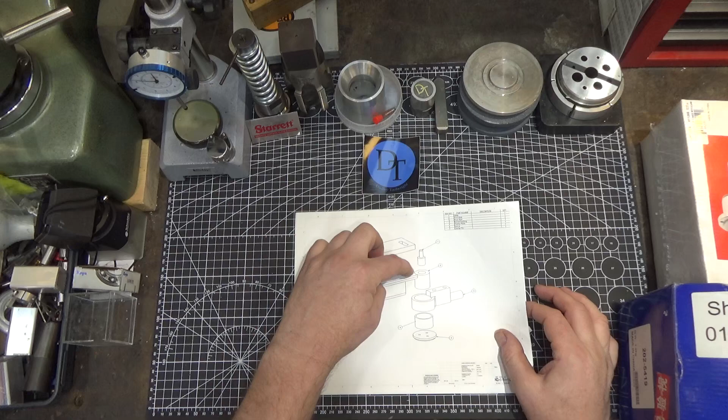Instead of the pin here, that 3/8 diameter pin that the stock rotates around, he used a 3/4 pin, which is this outside diameter of the base piece. And it seemed to work okay without too much effort on his part. So that's pretty awesome. The materials are pretty easy to come by, and I'm not sure that the dimensions on any of these parts are particularly critical.

A neat thing about the design is that the assembly here that does the bending is actually done by a 3/8 inch pin that sticks up there. My initial thought looking at the drawings without watching his video again was that this piece sticking out here did the bending, and I thought, gee, that may not last very long. But that piece actually mates up with the 3/4 diameter of this guy that sticks proud and makes a flush surface. It's actually a really beautiful design.

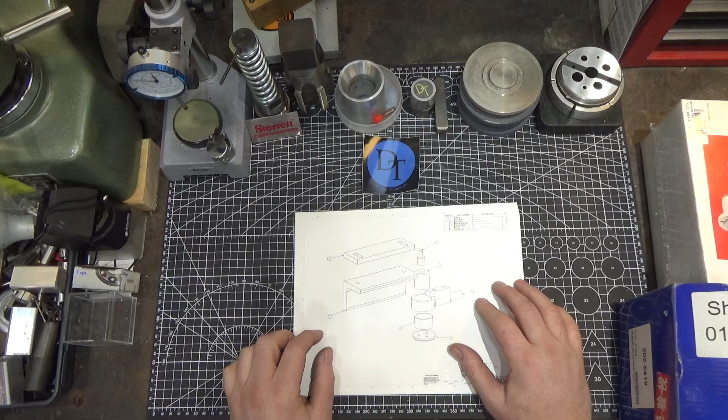So the part that does the bending is a 3/8 inch pin here, which you can easily replace, and this other pin here you can replace. There is a bronze bushing, so there'll be some cost in buying a piece of bronze there. You might be able to get away with some plastic in there, but it may not last very long with the crushing forces. Let's see what else we've got here.

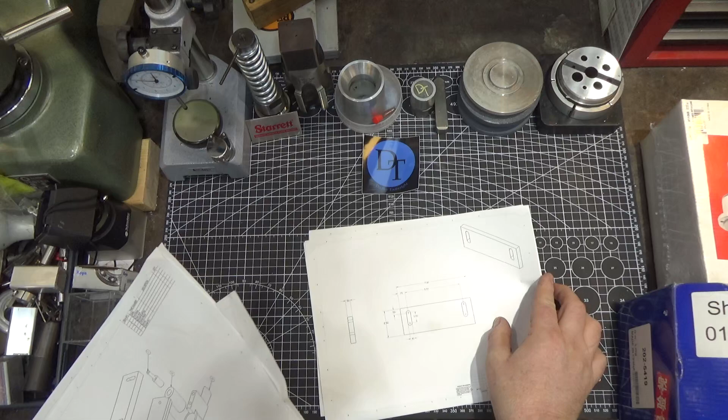The drawings he gave me are complete and pretty easy to understand. Tom is obviously a master, and he follows that rule that you don't double up on information, which is a standard for drawing design. I tend not to do that because sometimes I want to see a dimension on one representation of a part, and I'd also like to see the same dimension on another representation of the part.

But Tom, again, is a professional machinist, so he follows the rules of the trade. And so you can find any dimension you're looking for. You just got to find it on the drawing. It's all there. He did a very, very nice job on them. So thanks again, Tom, over at Ox Tools. And let's just get started.

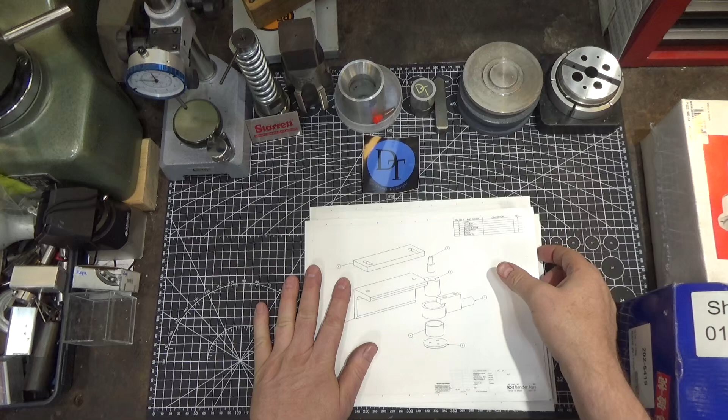Let's take a look at what stock I've got to make this guy. This guy's roughly 7 inches. Well, it is 7 inches long. This piece right here and this piece right here. This will make it stick out a little bit longer. So it'll fit in a 6-inch vise jaw, no problem.

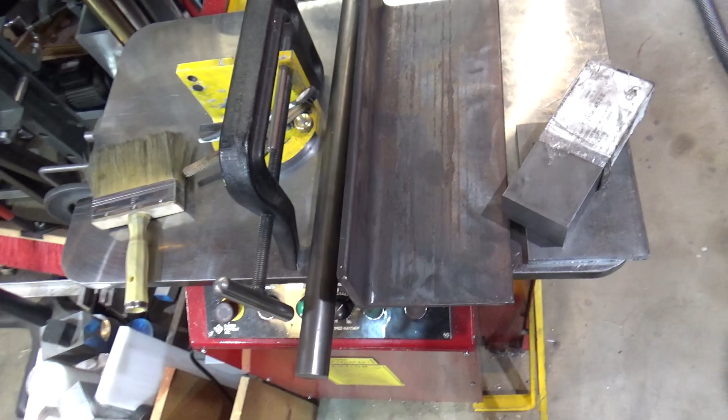Here's the stock I found for making Tom's rod bending project. And I buy all these as offcuts at my local metal supplier. For me in Southern California, that's Industrial Metal Supply. There aren't a lot of other suppliers down here. There are a couple, but not anywhere near me. But the advantage of buying cutoff is, like this hot rolled 1.5 inch rod, this guy is about 2 feet long, and it's the same price as their pre-cut 1 foot length. So that's a great find. I always buy those when I find them, even if I don't necessarily need them, because I'll use them later.

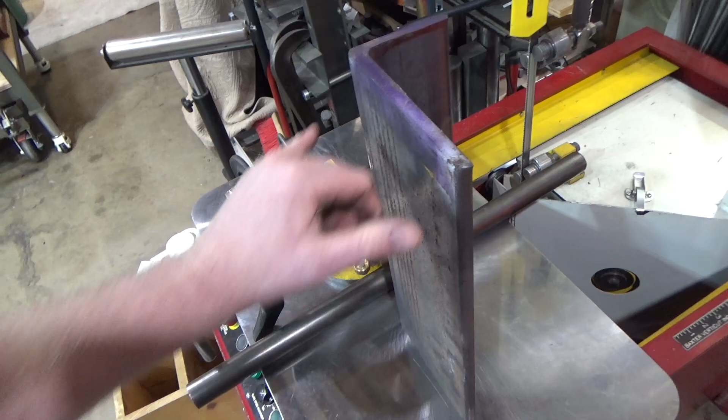This guy has a really weird proportioned angle iron, 1/2 inch thick, which Tom spec'd. It's more than 3 in this direction, obviously a lot more than 3 inches in this direction, but I can cut it down. And the advantage was, instead of paying full price in the artist corner, it's 49 cents a pound for steel plate. So this was fairly inexpensive, and we'll just clean it up. And these are some hot rolled cutoffs. And that should be everything I need to make this project.

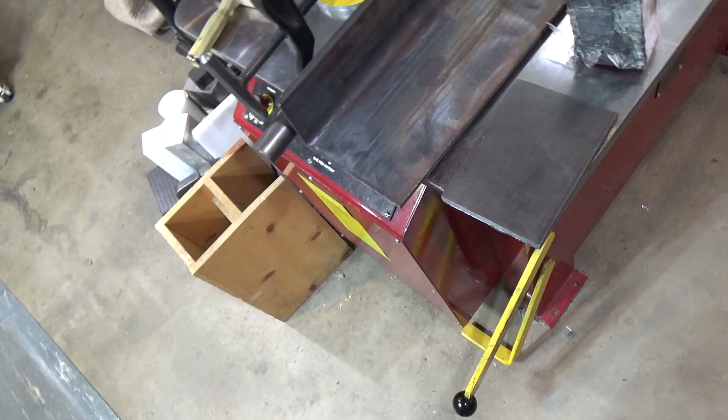I am going to have to dimension these. I have to spend a fair amount of time dimensioning these, so rather than make you watch all that effort, I'll probably bring you back. One thing to note, though, is that when I'm cutting this angle piece, I have a trick that I learned from someone else's video that I'm going to use. Let me show you what that is.

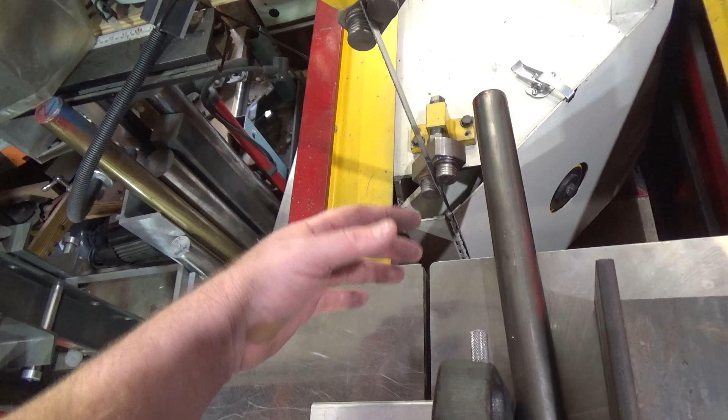So my first intuition was to take the angle piece, pop it up here with the long part sticking out, and that would go really great until you get to the end. Then I'd be cutting over 4 inches of material, 1/2 inch thick, which would cut much more slowly, not just because there's so much more material, but because the individual tooth pressure would be spread out over 4 inches instead of 1/2 inch. So even the tooth pressure would go down.

And if you increase the tooth pressure, you might overfill the gullets and then cause your blade to break or stick or get damaged. So one of the tricks you can use when you're cutting material like that is to flip it like this so that you have a consistent thickness all the way through. The clamping isn't quite as good, but it's still more than adequate to do the job. So that's what

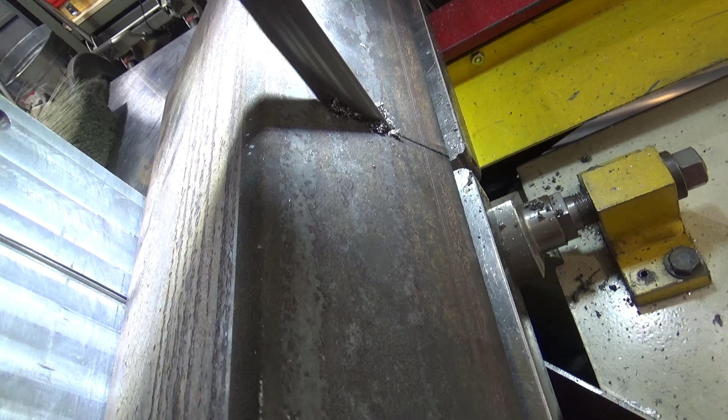All right, so I figured I'd start with the base part first, the part that clamps in the vise, and I've labeled the vise on the top sides. Not that it's really essential, but just to keep me honest. And we're just going to load this guy in here. And so I can get my 0 and repeat it, let's clean this off. We'll just use my vise stop and come up against it. And I'll set my zeros based on that.

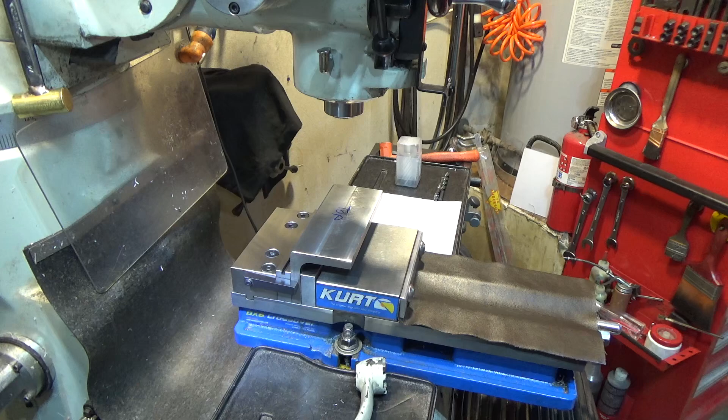And we'll start. First, we're going to drill and tap a couple 3/8 inch holes back here, 3/8-16, and then we've got to remove a 1.5 inch section out of the corner of this where we'll be welding the rotating post on. So that's a later part of the project, but we're going to get this part done and knocked out. I left the sides of this rough sawn because I like the look of it.

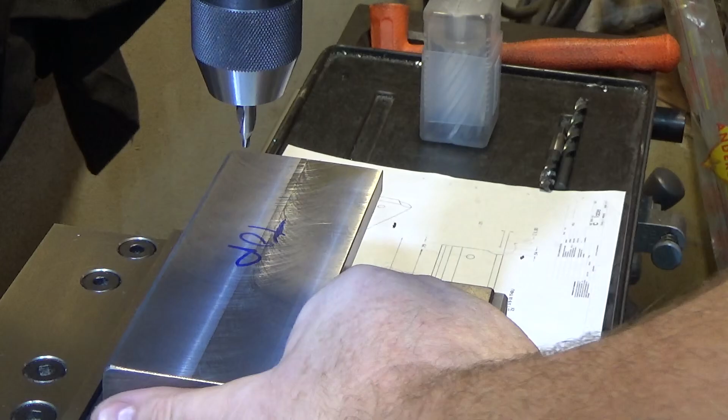So what I'm doing, which is how Tom has his drawing made, because that means the dimensions of this aren't critical width-wise, is everything's based off the center line. So he gives center to center distance here. It does count off this edge, which I did mill to be flat, but the sides I left, which means they're sort of rough to calculate distance based on. So we're using the center line instead, which makes it pretty straightforward. So it's plus or minus 2.25 either side. Alrighty. So that's those two guys.

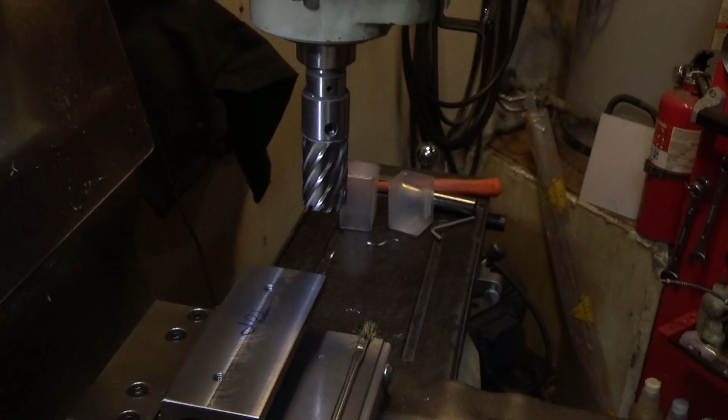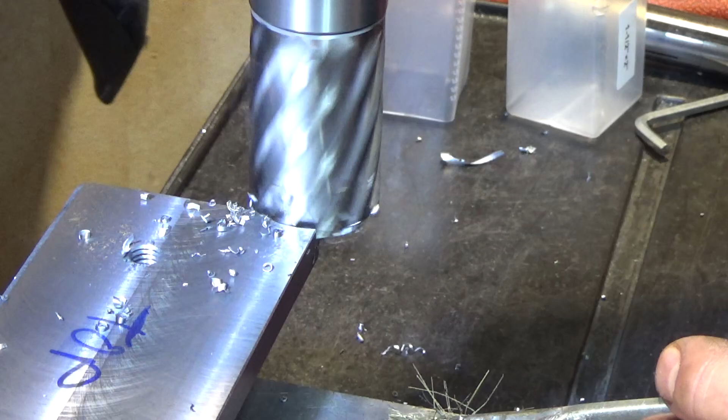Next, the design shows nipping a 1.5 inch diameter hole where the center is offset by 0.54 off the side, 0.25 up from the bottom, and that's where we're set right now. Well, I gotta tell you, this is only cold rolled or hot rolled steel, but it's cutting through it like butter, this cutter. And that's all there was to it. That was pretty trivial. So that's it for this piece. That's a really nice cut. I just got to deburr a little bit, not even much of a burr.

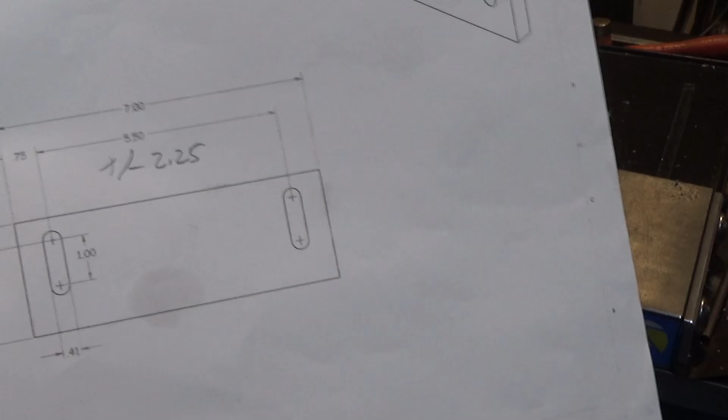One mistake people make with annular cutters that I've read about, at least on the internet, is running them too fast. Got to run them slow, especially the high-speed steel ones, or you can burn up the edges because they have a very sharp edge on the inside with a very small amount of material, so it can heat up easily and you can damage it. Next up, we're going to make the plate that the rod lies against that supports it for bending. It gets bent around a mandrel. This is just the piece that prevents it from going this way as you're trying to bend it down here.

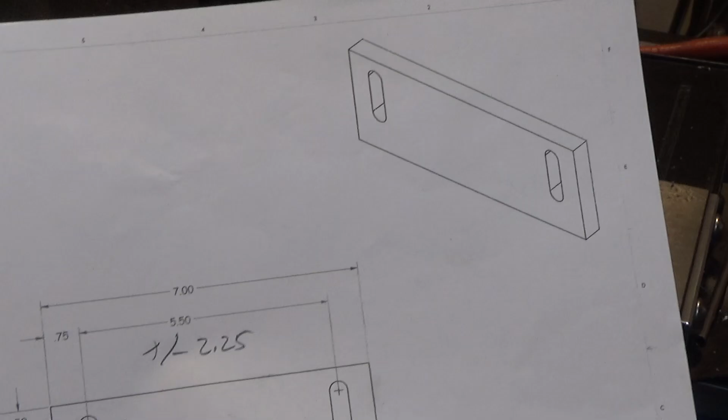By the way, when I divided 5.5 by 2, I came up with 2.25, and I'm probably the first person on the planet to do that. Should have been 2.75. He has the slots more closer to the edge. I'm not going to worry about that. I'm just going to maintain the 2.25 so I don't have to remake the part. It really isn't a big deal. So we're just going to do that right now.

And what I'm going to do is drill a few holes. They want 1/2 inch in, and then up to 1.5 from the edge, and I'm just going to punch a bunch of holes with the drill before I go to the end mill. This is a 3/8 inch drill bit. And I've got the mill slowed down. This is just mild steel.

And he actually has you mill the slot out to 0.41. I'm not quite sure why so wide. That's about 35 thousandths over. I'm not sure how he arrived at that value, but I'm going to follow it anyways, because I'm so careful to follow everything else. All right, so the next hole is up 1. So we're going to 1.5. I'm actually going just shy of it by 10 thousandths so I can walk up to it and get a nice clean slot.

That's deflecting. I'm going to do that with the end mill. I'm not happy about how much the drill bit deflects, or the chuck. So we're going to come back and follow that up with an end mill. So we're just going to use a 3/8 inch end mill here and nibble at the sides of this slot.

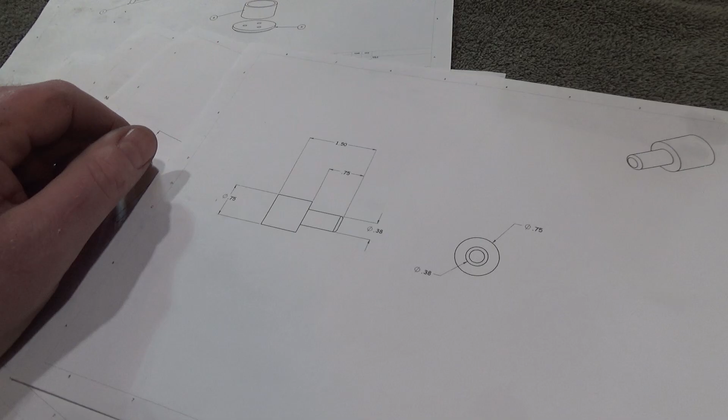I just got some 3/4 inch 4340 stock, which is really strong alloy steel, and I'm going to use that. It's not hard. I think it's in a pre-hardened state. I'll take a look at the Rockwell hardness on it. It would be nice if it was in the Rockwell 20s or 30s at least, because that would make it stronger rather than completely annealed. So first I'm just going to do a 3/4 inch piece, full diameter.

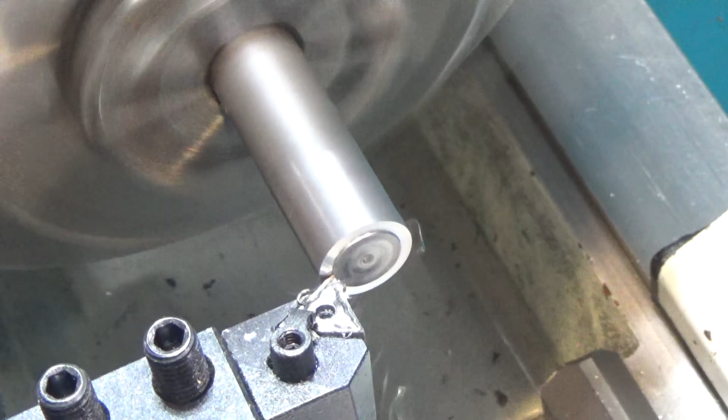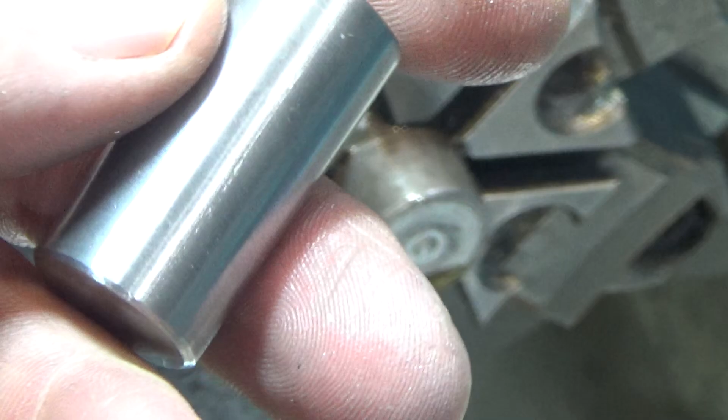That's some seriously hard material. I'm going to go check it on the Rockwell. I checked this sample and it's Rockwell C about 17. Not as hard as I thought it was. This alloy steel really cuts with some difficulty. Now I'm just going to make the .380 center version. I did the full 3/4.

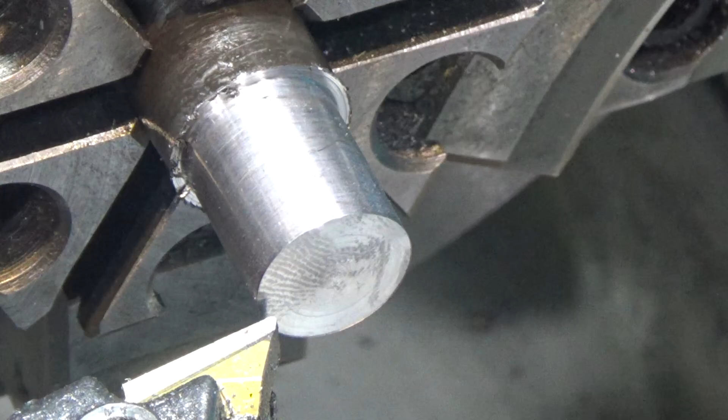We're going to do another 100 thousandths depth of cut pass. This is very hard material. The feed rate is only a couple thousandths per revolution, 3.5. I probably need a faster feed rate. Still getting a little bit of chatter. Great surface finish.

Light passes. Light passes don't leave a very good surface finish on this material. 50 thousandths depth of cut leaves a mirror finish. This is an 18 thousandths depth of cut, and it's nowhere near as nice.

And that's it. There's my mandrels, the 3 of them. .380 as Tom spec'd, a .750 like he did for his latest bending. I guess this controls the radius, and this is just a spare because I did my Rockwell hardness on that one.

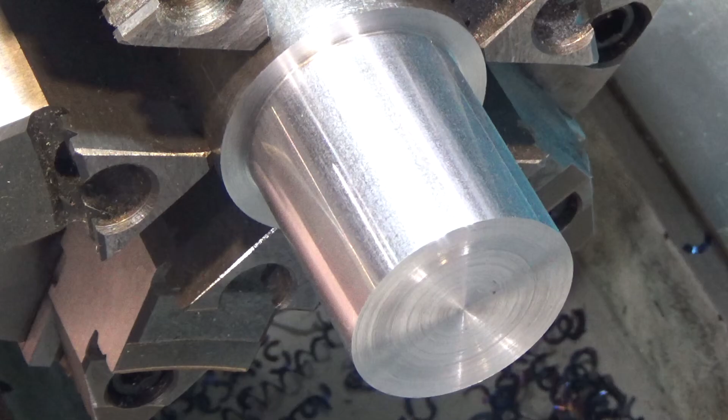So I'm dimensioning some cold rolled steel, and normally I can't get any kind of surface finish on it, but the truth is I've never tried pushing it this hard before. If you take light cuts, it's terrible. So what I did was I am taking fairly heavy cuts, 100 thousandths depth of cut, and also the feed rate is up at 7 thousandths per revolution, and then you get a pretty decent surface finish out of it.

Very frustrating because I've never been able to do it otherwise, so I'm trying to take this last bite at 101 thousandths to take everything I need at one time, because otherwise I'm going to have to take light passes and then the finish will go to hell. Also my RPM, 680 RPM. If I did it slower, I wasn't breaking chips, which is why I started speeding things up. But the surface finish is pretty fantastic, especially for cold rolled and hot rolled steel. This is cold rolled, I think.

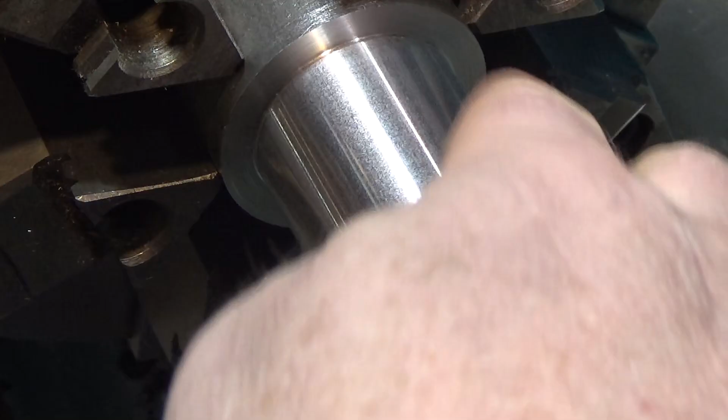All right, so if I did this right, this will be on dimension and a really nice surface finish. And oh, look at that, 2/10 over. That'll work. Ooh, actually 7/10 under. That'll still work. This is the shaft that the bending arm rotates around. So we needed 1.5 inches, and it's 1.4992. So it's around a thousandth. So that should be good.

So we've got to bore out the inside here. By the way, here's the chips it was making. Some unbroken, some broken, but nice, beautiful blue. All right, just drilling to 3/4 inch depth. We're actually going to go just shy of that. We're going to bore the final size out.

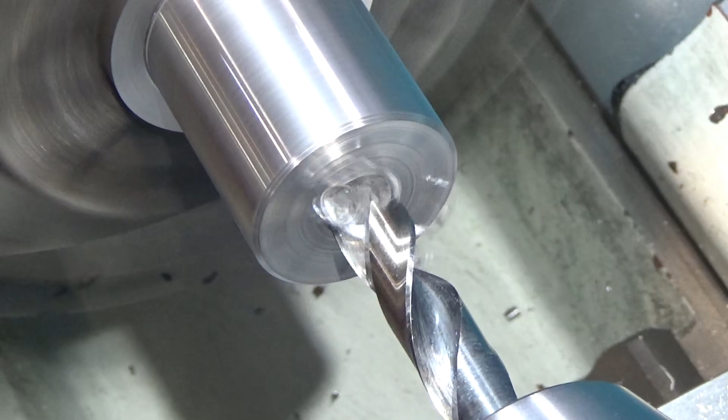So next up, before I bore this out to final dimension, I thought what I'd do was something that Tom doesn't have on his drawing, which I don't think will hurt anything, but it'll make it easier when I flip this over to drill the holes and find the center, which is to drill a rough hole. There is always a risk when you're drilling a hole like this, though, that the drill bit will wander, but I don't think it's too precise.

The holes on the other side are just for the cap, the retaining cap, and that floats on the outside of the bending arm, so I don't think that's going to be a problem. And if I take this slow, I think I should be able to get a decent hole. We'll just try it and find out. Oh, you saw that wobble? I saw that wobble. Never mind. I'm going to try a stubbier drill bit.

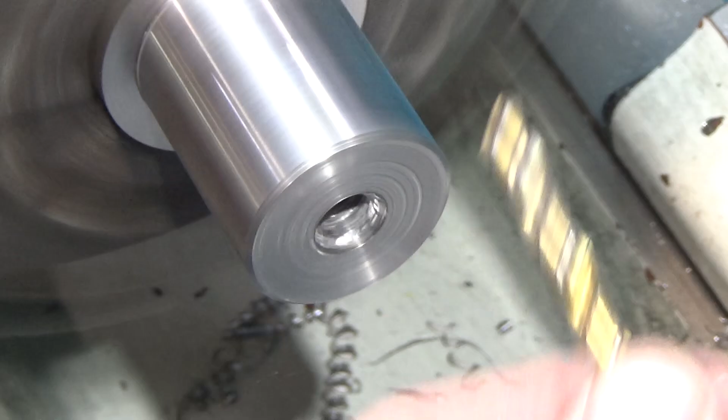So now we're just going to bore out the inside. Okay, so that's a dead-on fit right now. So we need to take off just like a few tenths, which means sandpaper. Okay, so a little bit of sanding. That's the kind of fit I want. Oh, that depth is perfect. Look at that. That sits perfectly flush. That's exactly what I wanted. Piston fit. So we're going to call that good.

This cold rolled steel, though, or hot rolled steel, yikes. Is it a horrible finish in there? Probably because I wasn't taking big bites. Yeah, anyways. Looks like I got the drill bit length nearly perfect. This is actually 50 thousandths long, so I still need to face this guy off to final length.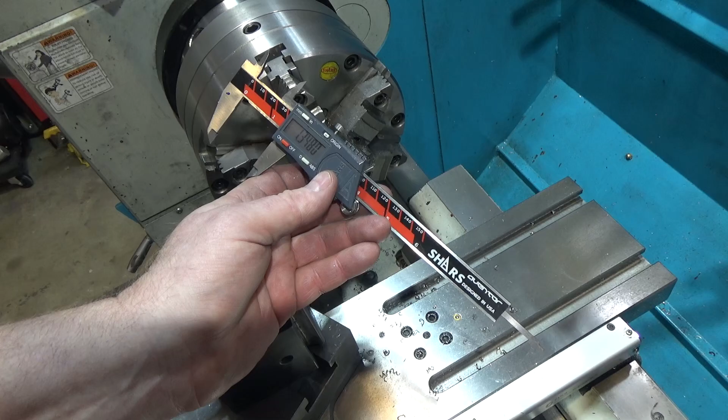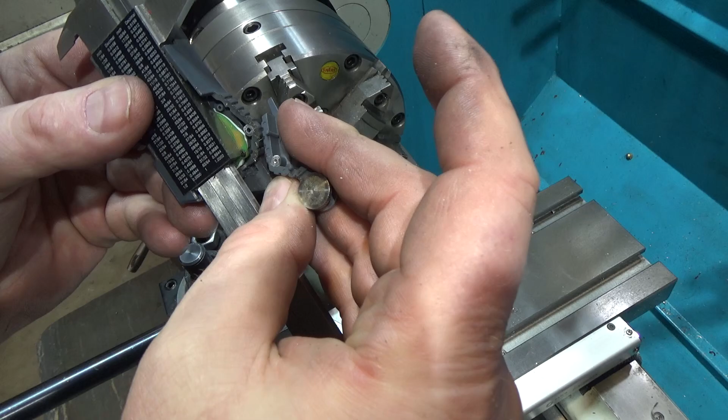Well, today, this is my go-to calipers. I've been using these since Shars sent them to me like 3 or 4 years ago, and they're my daily calipers. And interesting, I use the thumb wheel a lot to position this, and the only thing that holds the thumb wheel on is a plastic piece that has 2 little plastic pins, and it threads into one little plastic post, which broke off apparently, or came unglued. I can't really tell, but that's an unfortunate design choice on their part, my guess. I'm going to see if I can glue these back together and continue using them because I like them. But something to note, I told you I'd give you feedback as more came in, and more has just come in.

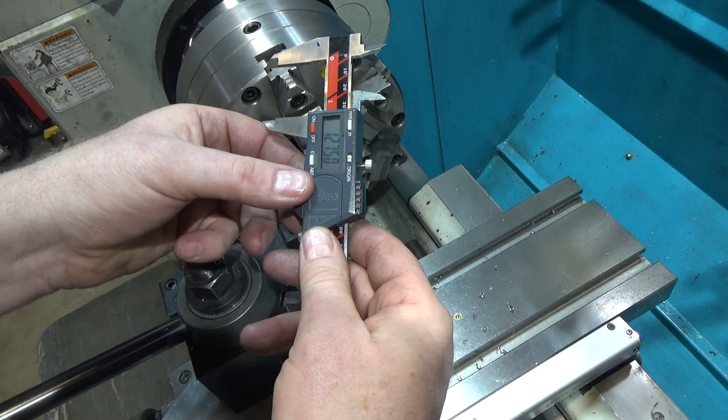So I faced off the other side, and I used a center drill to get the angle right. I have a 60-degree angle center finding thing, just a rod that I ground to center 60 degrees, and I use it for finding centers of parts when it's not critical, and this is definitely not critical. So we're going to do that, and we're going to drill and tap the 3 holes in the bottom.

This is the method I use when I'm only looking for a few thousandths accuracy on center finding, and since I put the bevel on here that matches this, which is incidentally a piece of tool steel, I drop this down and then I go back and forth and see what the distance is on either side, find its halfway point, both X and Y, lift it up, re-put it in, and do that over and over. And I find that I get within a couple thousandths.

So I'm going with that method because these are just bolt holes to mount the 1/4-20 screws that will hold the plate on the bottom. And so they're going to have a lot more latitude than just 1 or 2 thousandths. This isn't super precision work. I have compared this method to the Blake style, and it compares favorably. That's how I verified that it's a couple thousandths.

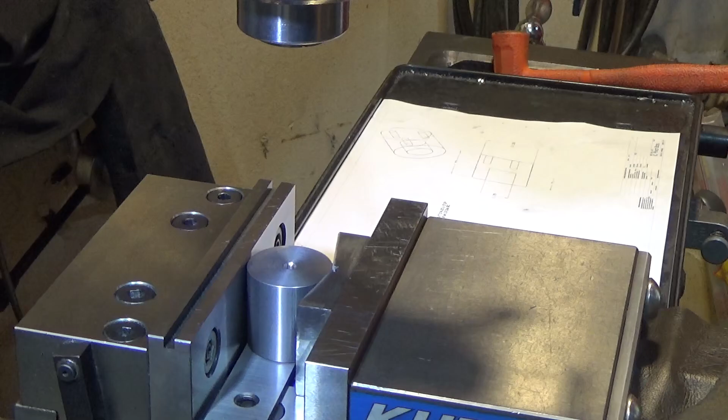The next step is to drill these 1/2-inch deep holes, tap for 1/4-20. It's on a 1-inch diameter bolt circle, so I'm just going to use the bolt circle feature of my mill to make this hole, and should be just fine. And he set the depth at 1/2 inch, but you could actually go deeper and not run into this inner bore,

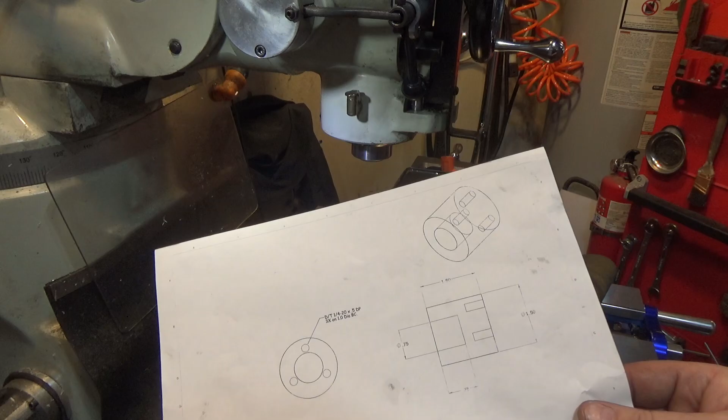which is interesting. I guess if you want to make it for different length thread screws, if you have very limited selection, you don't have to cut them off and clean up the ends of the screws, you could go a little bit deeper and not run into the bore on the other side, but I'm going to follow Tom's recommendations.

And we're done. So tapping blind holes, power tapping blind holes is risky. I was using the DRO on my quill. I left a couple tenths extra depth so that I wouldn't bottom out. The first hole was really close to hitting it or hit it. I was better on the second ones.

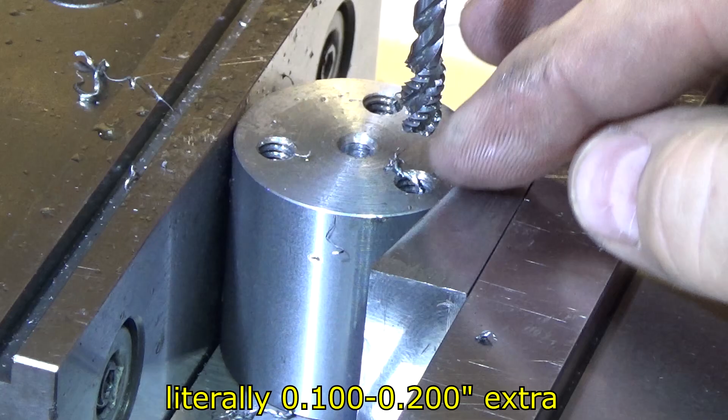All right, so here's the finished part, and it's done. This hole was not spec'd by Tom at all. I put it in on my own. It just seemed like it would make it more convenient for me to line this, so I used it.

Another thing to note, the next part is the plate that goes over this. The bending arm rotates around this piece, and so the plate holds it and prevents the bending arm from falling off the bottom. So that's the next piece to make. And the last part will be the bending arm bracket because it's the most complicated.

Now, to get a better idea of what's going on, this part here gets welded right there on the side, on the top and on the bottom. And this will challenge my welding skills because there is a moderate amount of rotating force on this because the arm is mounted low on this. So it is going to try and put some rotating force to make this try and fall off of here, which is going to make my weld more important.

The top part needs to be flush, so I'm going to run a weld bead down the center there. Then I'm going to have to re-mill this flat over here. It should be challenging. Hopefully my welding skills are up to it. I'm not sure they are. I'm a mediocre welder at best. Tom has also started as a welder, I think, so he's more or less an expert welder. But the fit's great.

Well, I made the last piece off camera, and it might have been interesting to show. I wasn't shooting it when I was doing it, but this is some hardened shaft steel, and it was interesting to work with because it was about Rockwell 25 on the outside, and the inside somewhat softer, around Rockwell C 8 to 10. But it cut really nicely and left a great finish. This piece goes underneath this piece, and then the part that I still have to make slides over this.

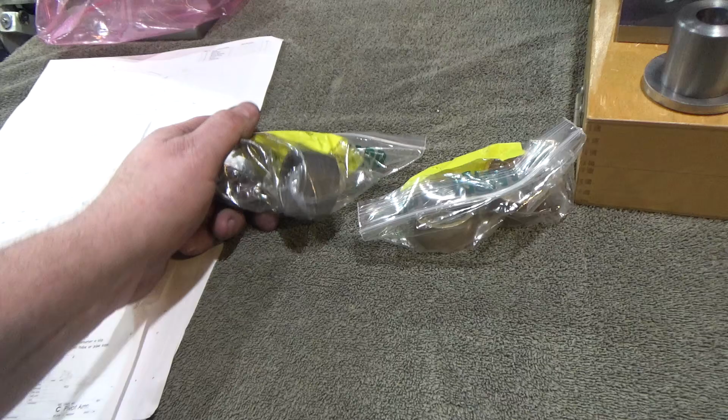Now I cheated a little bit. This is the part I just made, which just leaves me with this piece and the bronze bushing. But rather than buy a big chunk of bronze to make this 1.5 clearance 1.75, even if you buy the hollow bronze, you'd be spending some big bucks. And at McMaster-Carr, they have these bronze bushings, the exact right size, already done for me. This one's heavy duty, and this one's regular duty, bearing sleeves. So I thought I'd give them a try and see how they work instead of making my own.

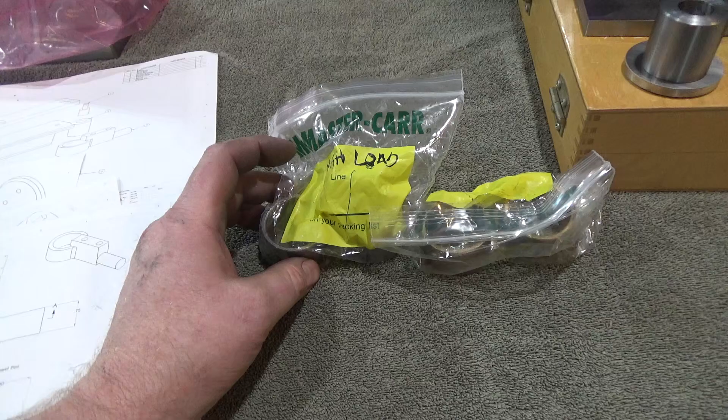Because, like I said, these were like $5 a piece, and the bearing bronze just for a 6-inch section would be about $100, and that's on eBay. But the last part I have to make here is by far the most challenging part to make. And in typical Tom Lipton fashion, besides being functional, it's very nice looking. And so there's going to be a fair amount of extra effort to make it look good as well in this part design.

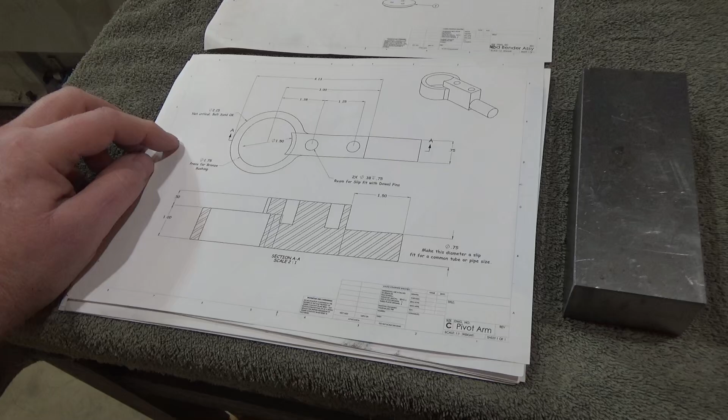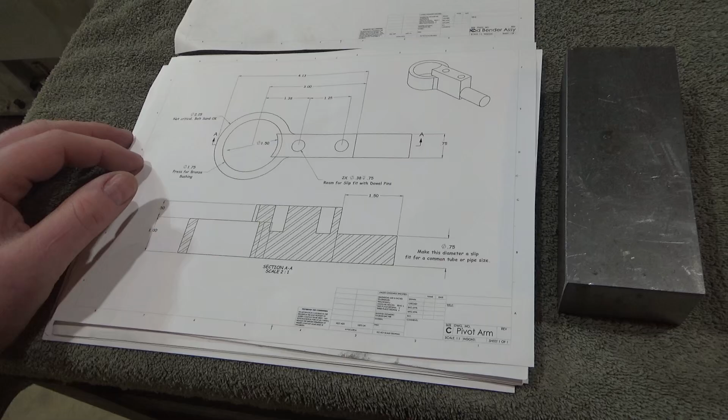There's a lot of steps in making this. Each individual step is simple, but if you get the order wrong, the work holding situation is going to be a real pain. So we're gonna see if we're up to the task Tom set before us here. So my first step, I think, is to rough out most of this material here so that I can turn this part round on the end here. This last 1.5 inches, 3/4 inch diameter, that's going to be a bit challenging all by itself.

So that's going to leave a big square chunk of material down here that I can hold on to in the lathe to turn that, which will be a pretty interrupted cut. So I want to remove most of this material first. So I've got to take a chunk out of this like here. And I've got to remove the side pieces down to here. It's also an awful lot of stick out. I might need to put a center in that as well.

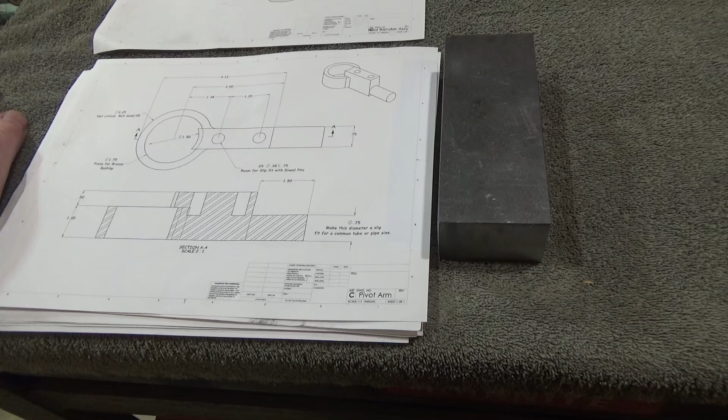We're gonna wing this. I'm gonna do the best I can with it, but I might very well screw this up because this is a challenging part to make. I'm sure Tom would see this as very easy.

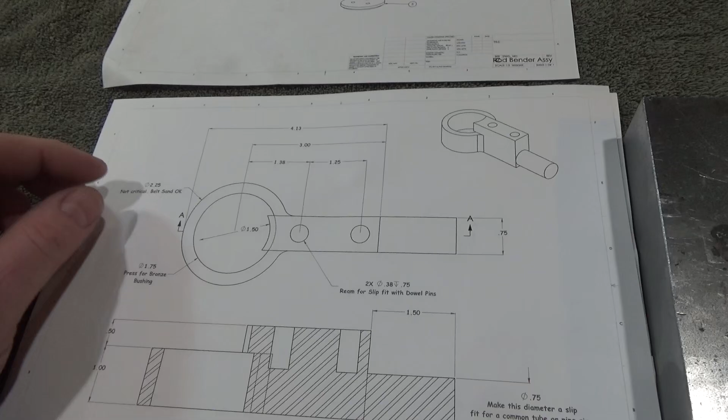By the way, if you were wondering, here's an example of what I was talking about earlier where Tom follows the rules of the trade, which is never duplicate measurements on a drawing. His reference is this side, except this is sanded. So I wanted to start on this side, use references from this side. So if I want to know the length from here to here, it's as simple as subtracting 1.38 from 3, but you notice he wouldn't put it on the drawing because that's a duplication.

It's unnecessary information. Now, I usually put information on drawings the way I want to build it, and maybe he did exactly the same. So sometimes I will duplicate information. If one operation comes from one side, the other from another side, then I will put measurements both directions just to make it easier for me when I'm doing the part.

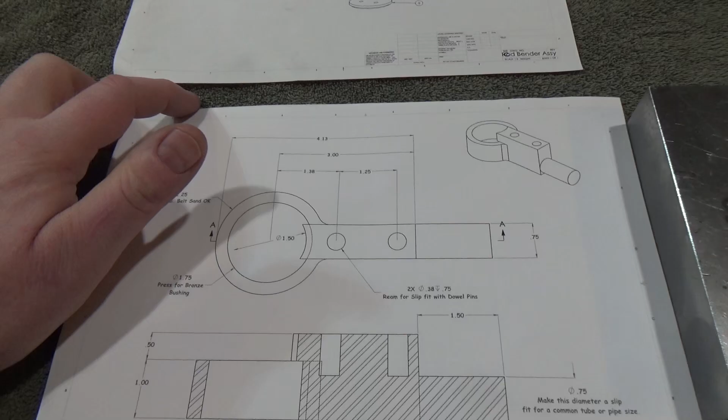But again, don't be surprised if you get a drawing from someone who knows what they're doing and they don't duplicate any distances. Like he didn't put 1.5 up here because it's down here already, and that would be duplicating information, and that's a big no-no in proper drawing design. Alrighty, well, enough stalling. Let's see if we can get to this part.

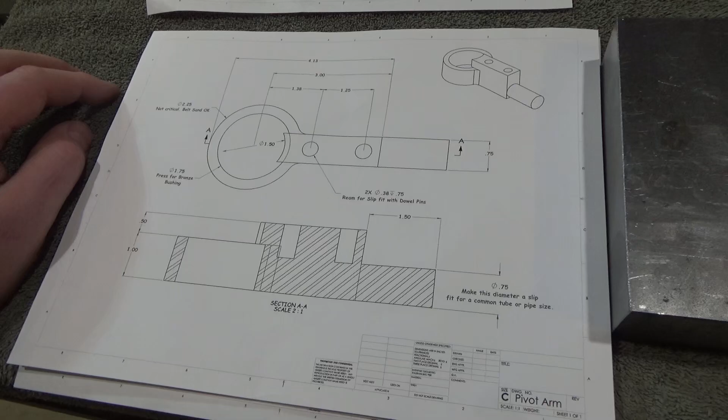All right, so I've done my layout lines here, and this is all material. We removed this out here as well. And it shows me roughly where that radius should be. I think a 3/8 inch end mill might be a nice looking radius for this intersection right here. So I've got to remove all this material, but initially I'm going to remove material right down to here and leave this square portion intact so that I can hold this in the lathe to do my offset turning for the round portion right here.

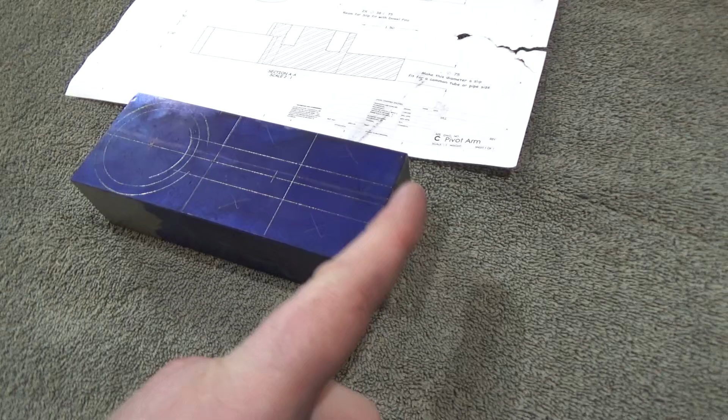This piece is actually a little bit long in this direction. My reference side is over here, as Tom used that as his reference for his drawing. And so I use the same reference point, and the fact that it's a little long doesn't matter. That just means this sticks farther up the pipe, which is not a problem.

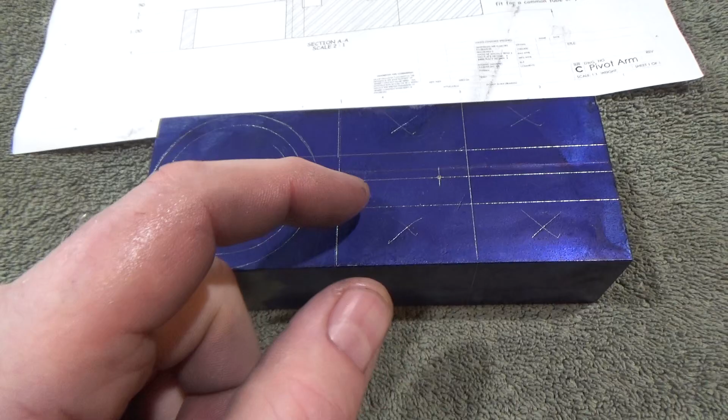So I think I've got my marks for my 2 3/8 inch dowel pin holes. Here's the center of the circle. And I think I'm going to use an annular cutter to cut this out when I get there. The smaller annular cutter, 1.5. I have a 1.75 annular cutter, but the problem is you don't remove all the material. If you look at a side profile, you see that this top part extends just 1/2 inch up here, and then the bottom part is 1 inch where the bearing gets press fit. That's a little bit tricky.

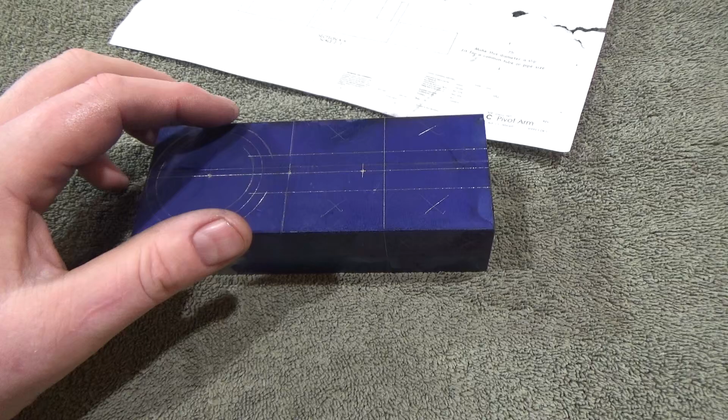I've also marked the material that gets removed out of here from the side profile. And I'm thinking I'm just going to use a roughing end mill to remove this material. I was going to bandsaw it out, but I think I'll have better luck with this thick of material with the roughing end mill. I know that bandsaws are typically faster, but I'm still a bit of a novice and I tend to not get as straight a cut as I like. So I'm going to use an end mill because I've got better control that way. At least the machine has the built-in hand-eye coordination that I lack. So we're going to head over to the mill and rough out this part.

So work holding is going to be a challenge no matter what, but I'm going to remove the 1/2 inch depth of material off of just this section right here. So I'm just going to remove this part first. Then I'm going to flip it on its side and remove all of this material going back to here on each side. On the first side I'll have plenty of gripping. On the second side, this part will be protruding out, so there's going to be some chatter. So we'll have to play it by ear. Maybe we will be back to the bandsaw for the second side. I'm not sure.

There's the first part done. Now we got to flip it on its side and remove a bunch more material. This is probably going to get more and more problematic because as I remove more material, there'll be less support. So when I clamp the bottom, there'll be nothing clamping on this section right here, for example.

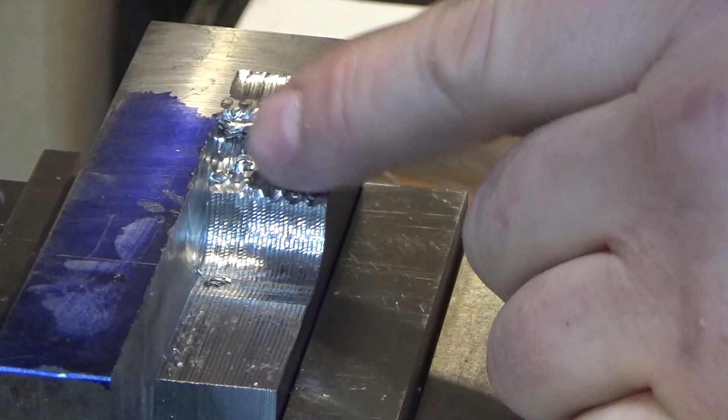So you can see one of my oops here, and it damaged a little bit of the material I care about. Actually, yeah, a fair amount, unfortunately. Hopefully it doesn't scrap the part. So what happened here was, even though I had a little bit of brake on both my X and Y axes, and I was holding on the hand wheels, the roughing end mill caught because I was trying to do a full 3/4 inch depth of cut.

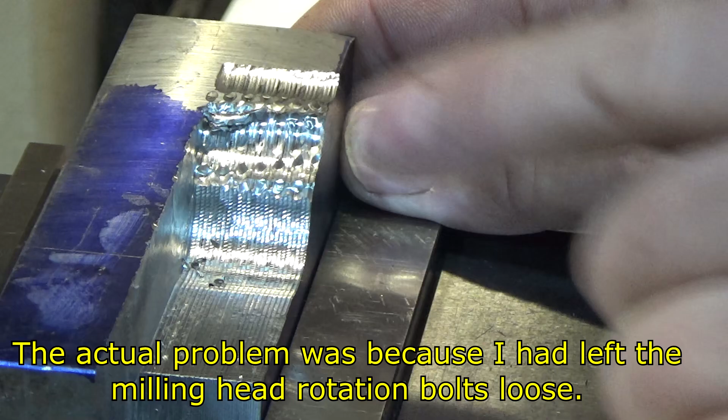I wasn't doing that big a bite, but it's actually easier with a small bite than a big bite because I was skimming along the outside edge and it just caught and it yanked everything, yanked the table and pulled the cutter right into it because it turned it into a climb cut. I wasn't doing a climb cut, so I was going in and then coming back this way, which was conventional milling. Yeah, I screwed this up.

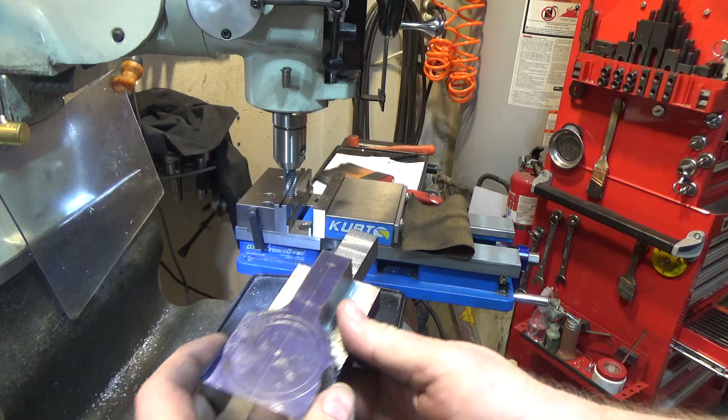All right, so I went over to the bandsaw and I removed this material here and realized I just made an order of operations mistake. So when this was all solid material, removing this material here was a mistake. I should have removed all of this first, then taken this over to the lathe, turned this part round, and then come back and removed this because it would have given me a more stable thing to grab onto. Now I don't have that, and that was bad.

Of course, this was definitely bad. Look at the chunks of metal ripped out. It just yanked the table, even though I was holding on to it with friction. It just shows you, if you're an experienced guy like Tom, you probably never would have tried it. These are the tough lessons you learn.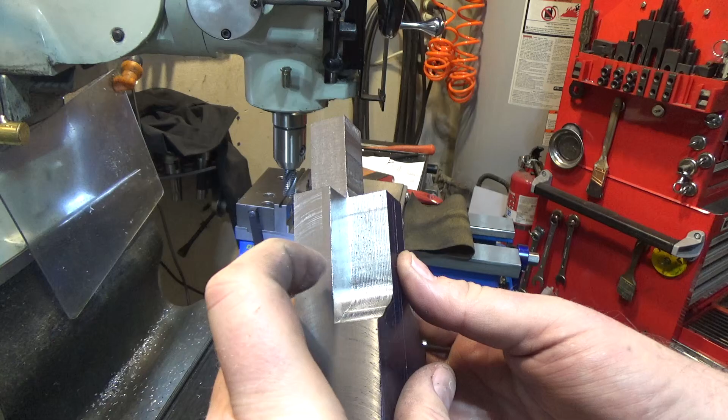So we're going to try and turn this in the lathe next, as long as I've got a little bit of extra supporting material here, and then I'll bandsaw this off after this part, and this part I'll bandsaw off rather than taking the end mill. I thought that was a good idea. Live and learn. All right, so we're going to make this round first because after I remove this material here, it'll be a lot less stable.

I measured and put a mark in the center. This isn't critical, it's just for where the pipe goes. Actually, none of these measurements are critical other than the center diameter, so that shouldn't be a problem. And we got it in our 4-jaw chuck and it's off center. And we're just going to turn it. It's going to be an interrupted cut. And we're just going to turn this part round to 3/4. And I think we're going to try 440 RPM. Hopefully that won't be too much. Let's see how stable that is.

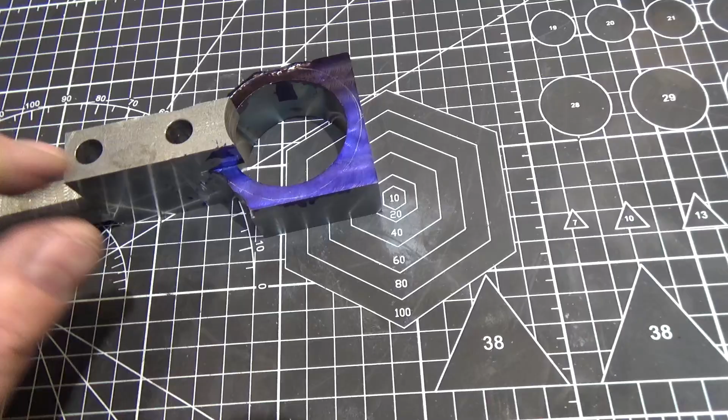So I don't know how hard this is for you to see, but I've scribed a line in the Dykem, and I'm just going to sand up to that line, and that will be my part. I probably can take this over to the bandsaw and cut these corners off to save myself a lot of sanding time. But other than that, I think we're going to be good.

Well, let's try the first assembly. So I got this mostly round. I do not have Tom Lipton's hand with a file. There's definitely some high spots here. I need to scribe another line to get this better. I have terrible hand-eye coordination, so I was not impressed. So this guy fits here, and that's an excellent fit. I don't know if you can see that. There you go.

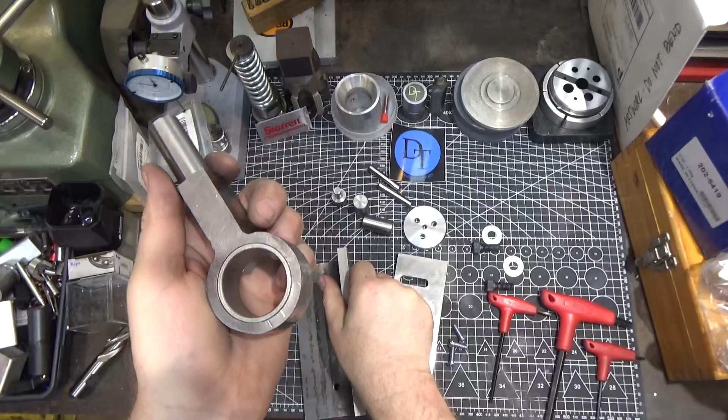The bronze bushing I pressed in this case just using the vise. I didn't even go to the hydraulic press because it really wasn't necessary. And this is kept in place with these 3 screws, which are just right here. I think the fit's a little close because, yeah, if I tighten this, I need to remove some material off the bottom of this, because if you tighten this all the way down, this guy won't move at all. Yeah, locks it in place completely.

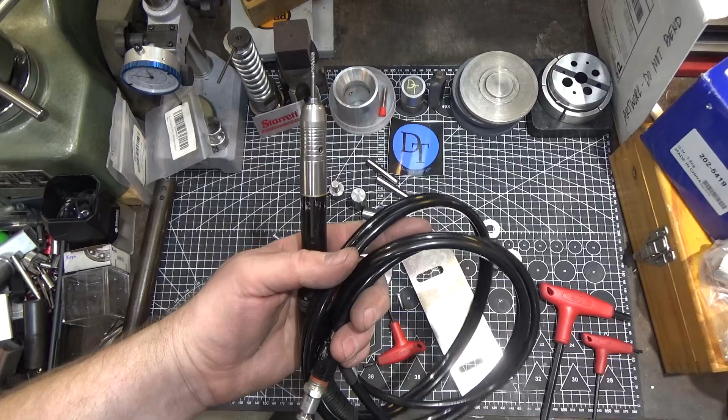So I think it needs a little bit of clearance, not much. It's partially because it presses up against the weld in the top, and I got rid of almost all of it, but there's still a tiny bit left. So I took my Nakanishi die grinder and took off a little bit of material, and I think we're good now. This thing's been really handy.

I bought it on eBay used, and it was supposed to be in working condition. It wasn't. It didn't work at all. So I had to send it back to the manufacturer. And I got my money back on it because it didn't work and they didn't want it back. So when I sent it to the manufacturer, it cost me almost 200 bucks to get it repaired. So I did have to invest a fair amount in it, but it did end up working. So now we're good.

There's enough clearance that when this is tight, it'll still be able to turn. Probably could use a little bit of lubrication too. This is an Oilite bearing, so it's pre-lubricated to some degree. Yeah, it still can rotate freely with this tightened all the way down. I think 3 screws are nice looking. Probably not necessary for this application, but I guess I'll defer to Tom again.

Okay, so that's that part, and that's looking really good. I think that's enough range. I might have to in-cut a little bit here at some point if I need to rotate more than I planned. And I guess we'll start with the pin that he prescribes in his drawing. And I'll put both pins in here, although they're probably both not necessary.

And when this got hot, it changed the dimensions of these holes a little bit. They were loose before, but I might have to run some sandpaper in there to get these to go smoothly in and out. They used to, they were for a while. Now let's try that. This was my first fit, so I took an arbor that's split, put it in my drill motor and cleaned out the hole, and took up the couple of tenths that was the problem.

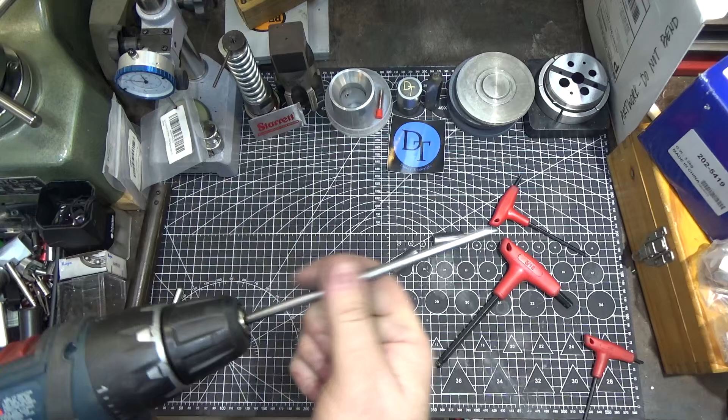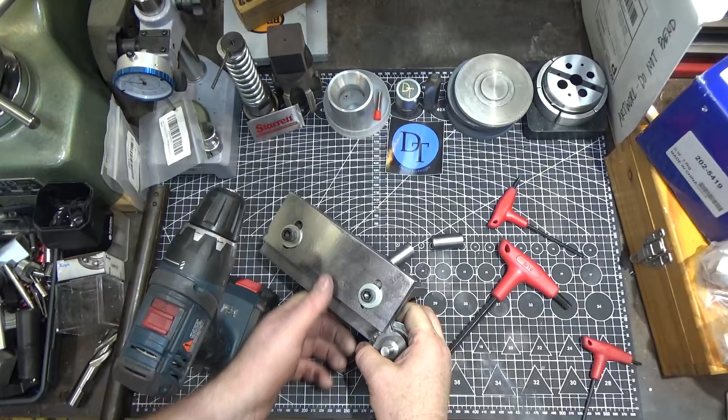I also cleaned up a little bit of the weld here. There was just a tiny bit sticking up and it's causing this to stick. So we're good there. So let's put this in. Okay, we're good there. And I don't need the second pin. These are the larger diameter pins. So next up, we just pop this guy in the vise and give it a try. Whoops, forgot one difference. Got to put on my handle, our giant lever arm.

Now, the problem with my bench is that where the vise stands, it's not really attached to much of anything. It's just free floating above the ground. So I'm not quite sure how well this is going to work. I'm going to need a new vise location, I think, before this is over. I thought I'd really give this a go, so we're going to start with something hard like this. So you'd have to preset this guy here. And this is some heavy-duty aluminum welding wire.

Oh, and look at that. Just like butter. Boy, that was really easy. This thing's amazing. It took a bit of force, but we got it. All right, all right. We'll try something a little more challenging. I actually don't have much in the way of round stock in stock. So also the position of this sets the minimum length you've got to have stick out for the bend.

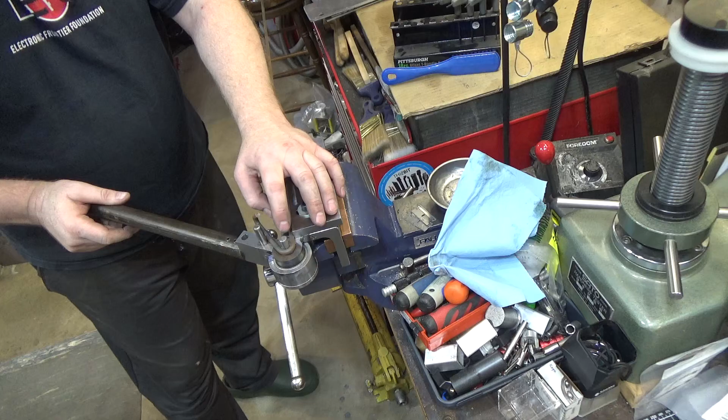So let's see, are we in frame? Yes, we are. Okay, so how hard is this? Not hard at all. Not hard at all. That's really easy. So let's try a compound bend there. So let's try that. And how about this? So I noticed that I would love to be able to do 180, although there's probably no way to do 180. So that was trivial. That was on some 1/4-inch stock too.

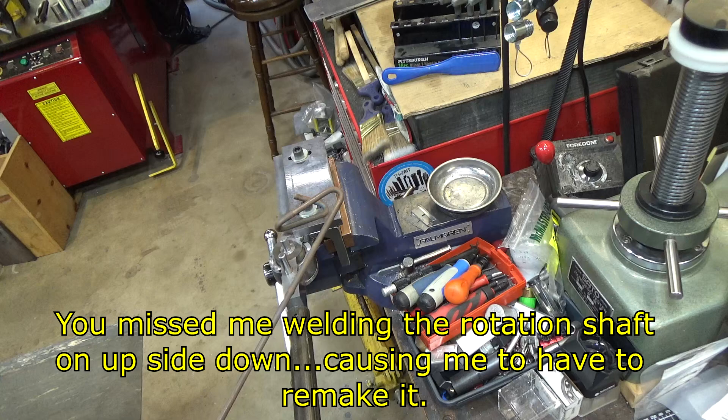That really was snazzy. It might be nice to put some marks on here so that you know where your bend's going to end up and to help you predict where it's going. But I think the bottom line is this thing's a great success in spite of my huge number of errors in this project. This was one of my worst projects. But I thank Tom Lipton for the idea. It was really cool. And I had a lot of fun making it. I learned a lot. So I think it was a huge plus.

I've seen Tom do some 3/8-inch stock. I don't have any 3/8-inch stock. Let me go look. All right, well, I think this is too excessive, but let's see. No, that's a bit too much for it. I was able to bend it a little bit, but it's gonna damage it. So I think maybe 3/8 and under. Well, 1/2 inch was too much. I've seen Tom do 3/8 with it, so I'm sure it can do that.

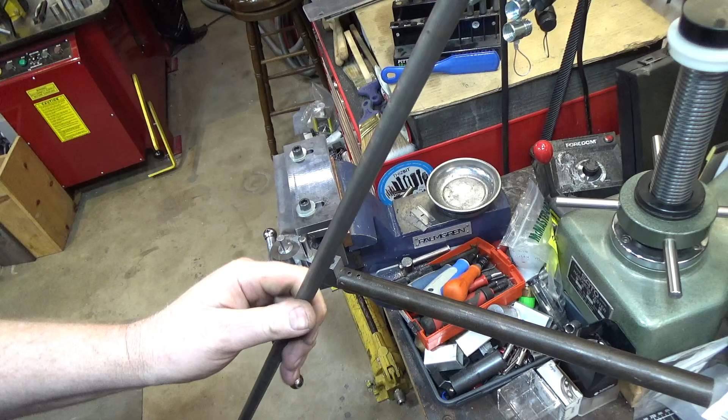You might have to switch to the larger diameter center mandrel like one of these guys. And then maybe, I don't know about this pin on this side, it is hardened. So got some nice options. By the way, this isn't limited to round stock only. You can also do flat stock. This is 1/8 inch by 1/2 inch mild steel stock. And it bends that without any issue whatsoever. Not a problem. So very cool.